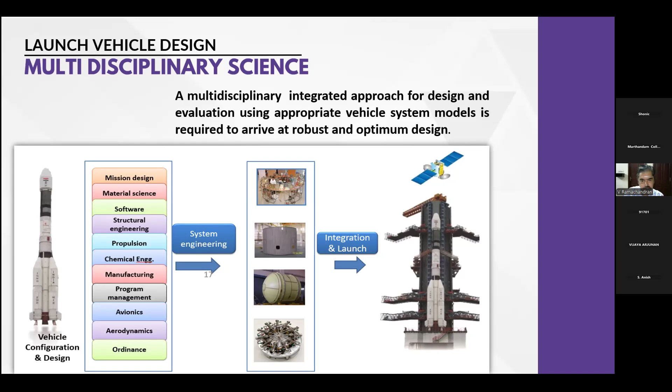So when you come to mechanical systems, it is not one system. It is having structures, mechanisms, control, actuation, systems like propulsion, assembly, and integration. All this comprises of very closely toleranced hardware.

And not only that, these structures are very optimally designed. If you ask what is the difference between an aerospace structure and a civil structure like a bridge, the bridge will have a lot of margin. It need not fly and it need not put an object in orbit. So the mass ratio plays a very crucial role in every system going into the launch vehicle.

So it is very carefully, optimally designed structures. The margins will be much less than 1.25, whereas civil margins will cross 10. The margin factor will be more than 10 in case of civil structures. In our structures, it will be 1.25.

That is the comparison. So it involves cleanliness control, like control and propulsion systems have to be assembled in a very controlled, contamination-free environment. So all such systems are very elaborate systems and facilities. It cannot be just started like that. It requires very expensive build-up of infrastructure.

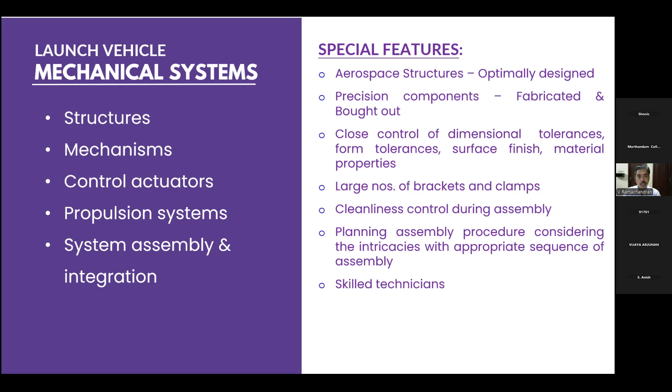So this is indirectly what I told about structures which are very optimally designed. Not only that, it has to work in various environments. Some are in vacuum, some are in high thermo-vacuum, some are in high dynamic environments like vibration and shock. So all such things are also very specific to our space system.

If you see an automotive vehicle, that environment is reasonably understandable. Maybe road conditions may be bad, and to some extent road shocks will be there, so shock absorber design may be challenging to that extent. But here, aerodynamic ascent itself poses all kinds of criticalities for all the elements.

So that is one unique aspect - no repair chances. I have put limited repair only in case of the space station, where the next set of crew can go and repair if they find some problems. But in our launch vehicle, there is no chance of repair.

And I already told that the weight should be very carefully estimated. The project gives a budget estimate of mass for every component and system. It should not be exceeded. Otherwise, the payload capability will come down.

So it is very carefully designed, but we employ very high strength materials to take care of this. With a minimum weight, we can even go for maximum performance. As I told, very high cost facilities - dynamic testing like vibration tests, thermo vacuum chambers - all these are very hugely expensive, along with static test facilities which are all required to be built to test and evaluate our systems.

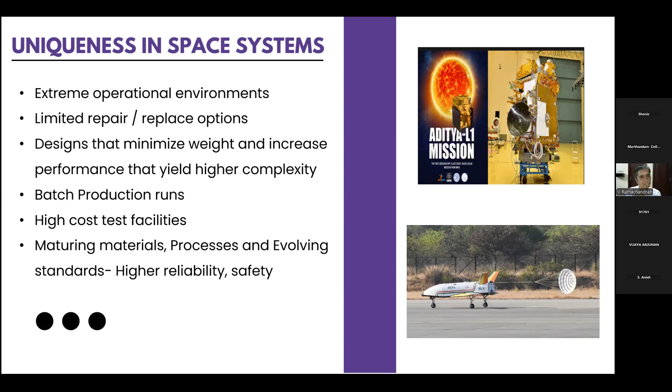Oh, this is a uniqueness. You might have seen the Chandrayaan launch, which got global welcome and appreciation for entire ISRO and the country. So the heart pounding moment is this: when you sit on the vehicle at the launch pad during the launch, the last 10 minutes is on an automated launch sequence. Nobody can do anything - it monitors all the parameters. It gives a lift-off signal. The vehicle is lifted off.

Another 18 minutes of the launch vehicle journey is also very exciting. Every system has to perform. You might have seen the nominal trajectory and the ongoing trajectory of the vehicle - you can see it almost overlaps. So that way, it is really heart pounding.

It is when the vehicle has put the satellite in orbit and the mission launch range director says the mission is completed successfully, and the mission director also confirms that it is put in the intended orbit, that it gives us some sort of satisfaction - like winning the World Cup, nothing less than that.

Everybody, if you go into the launch pad area after the launch, the people will be bubbling with energy and jubilation. Everywhere you find happy faces. This is a thing which you will not get in any other industry. This industry gives the challenge, but once the challenge is fulfilled, you get complete satisfaction and real jubilation.

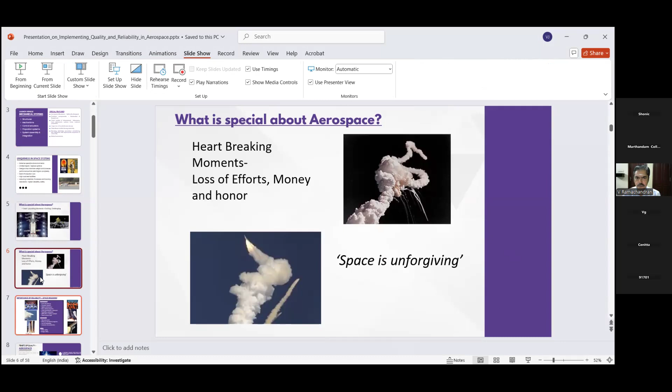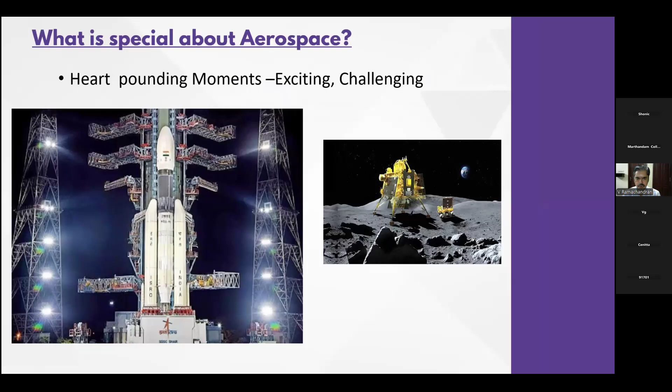Next. Yeah, this is whatever I told, the excitement and jubilation of a successful launch. Exactly the opposite is true if the launch vehicle fails at the launch. It breaks all our moods, and there is a reservation on the future of that particular project.

It halts the whole progress of the project for at least six months to one year. Anyway, loss of efforts, money, and honor, all this will bring the mood of the people down. Bringing it back again to normalcy takes time. So that is one risk.

If it is failing, it will break your heart, it will halt your progress. You have to redesign some elements, then it will go back to some level of progress, whatever already made, then you have to come back. Anyway, ISRO is capable of coming back, so that is not a big problem.

But temporarily, everyone will be down. What went wrong? They will be curious. There will be a nationwide committee which will address all these mishaps and give suitable remedial measures. We will come back, but this will halt the particular project for some time.

And sometimes, if the common modules are there in any other launches, the other launch vehicle will also suffer some progress halted for some time. After verification only, it will be allowed to go ahead. So in that sense, it is highly risky. Space will not forgive any mistakes, so that has to be kept in mind every time we do a space system realization.

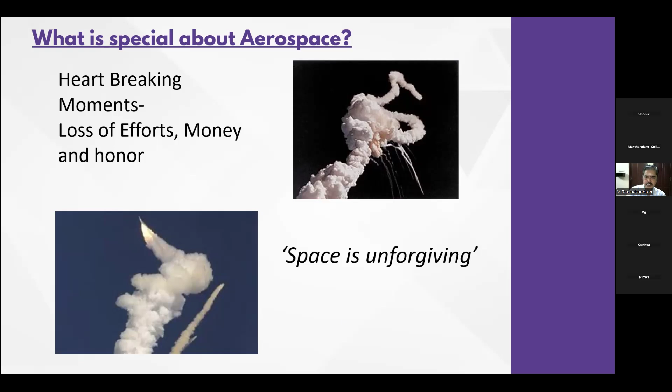This aspect of space being unforgiving means the problem, whatever escaped our screening, will show up in flight, and definitely we have to pay the price. Next slide, please.

So this is another mishap, the Challenger shuttle and Columbia. This is very famous, we lost a manned mission, which is the ultimate failure. We lost all the crew. When we go for a manned mission, all these lessons are addressed.

So how to have health monitoring of the vehicle, and how to detect that any problems are not there in the ongoing vehicle. Before return, we have to verify the health of the launch vehicle which is carrying the crew module. Subsequently, during orbiting, we have to constantly monitor the crew module.

If there is a problem during the launch vehicle ascent itself, we should bring back the crew at any cost. Even if we are not able to fulfill the mission, we have to bring back the crew. That is the crew safety aspect.

The range safety aspects are there in every launch vehicle, that is, if the vehicle is deviating from its intended path and crossing a safety corridor. Then the range operation director, who normally, if you watch a live program, he only says the first stage performance normal, second stage performance, he is the person authorized to monitor this.

And finally, he will see if it is deviating beyond a safety point and the vehicle can pose a threat to your local landmass, then he will take the call, after consulting management, to destroy the vehicle in air. So range safety aspects are there. Every stage has a destruct system mounted, and the command is given based on the requirements.

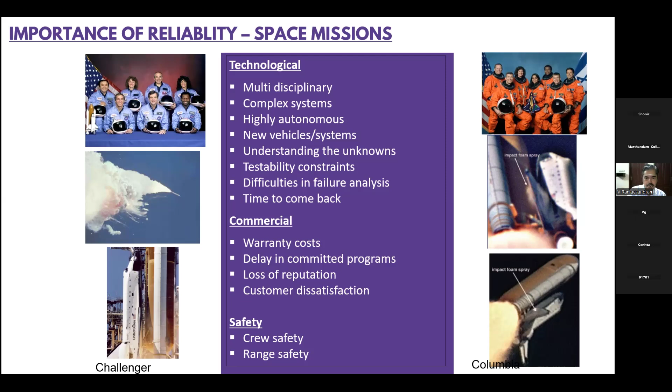So far, we haven't had to do that. Either the failed rockets were also falling in the sea, not posing a threat to the landmass, which is a blessing. Next slide, please.

Similarly, all our modular concepts are there. They have to realize and deliver on time. Between the teams, we have to communicate. There is automation in QC. Right from the work center, they can communicate with people. If there is some doubt, they can always check which way to progress. And if there are corrective actions to be done, these communication systems are there.

Even every deviation, however small, has to be analyzed and traced back. If possible, it has to be sidelined. Otherwise, it has to be decided based on facts and tests. That is what I have put. In some other slide I will indicate what the non-conformance protocols are.

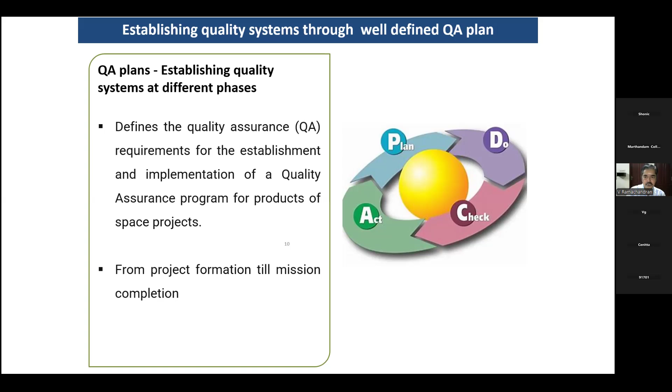Who will do the quality control function? Who will do the process control function? They define this through a document called the QA plan. This is done in a planned and systematic manner to ensure that the company's quality objectives are met at every stage of realization. So the QA people or management representatives give confidence to management that the company quality policy is adhered to at every stage of realization. At the same time, to the project, who is the customer, they confirm that the product delivered meets the quality objectives. So this is the definition of quality assurance, and this is how it is done, through QA.

So this is what I have already told. This insists on documented procedures, and all the requirements should be put for every phase, right from the development phase to the qualification phase, acceptance phase, and finally the flight delivery phase. Everywhere these documents and procedures are in place, and every quality assurance agency involved at every stage gives a paper confirming compliance, and they will give a compliance certificate. This is what is monitored by the overall QA system people.

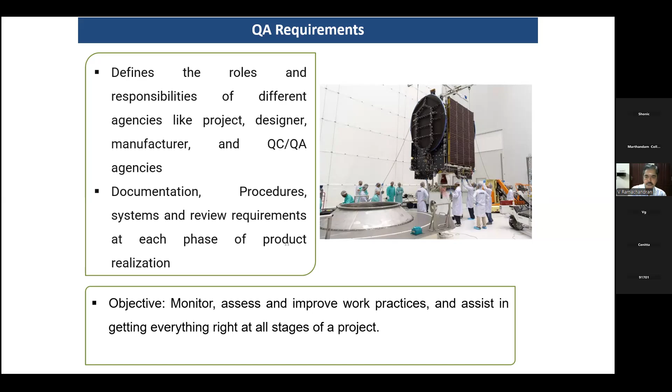This gives the overall plan, right from concept review to the flight realization phase. Here I will try to say two aspects: one is qualification testing, and later testing and acceptance. The qualification testing will bring out the margins in the system. It is done to evaluate the design margins, like the factor of safety of 1.25 put in a typical structure. So these structures or prototypes at realization will go through the required load cases and ensure that the qualification testing proves the factor of 1.25 is really there in the design, through the model tested. This is the aspect of qualification testing. Some other aspects of qualification I will cover later.

The flight system acceptance is slightly different. This is done to assure the flight hardware against random defects such as workmanship or raw material issues. These defects cannot be captured in a regular screening process; in spite of the screening, they may escape. So the idea is that it should pass successfully in flight. These factors are slightly lower: the factor of safety for qualification, which I said was 1.25, will sometimes be 1.1 for certain high caliber pressure vessels, and can be as high as 1.5, where the margins will be much higher than 2. So acceptance test is done at a level just above the flight levels, so that once it passes, it gives confidence it will successfully pass through the flight regime. That is the idea of acceptance test. We can go to the next slide.

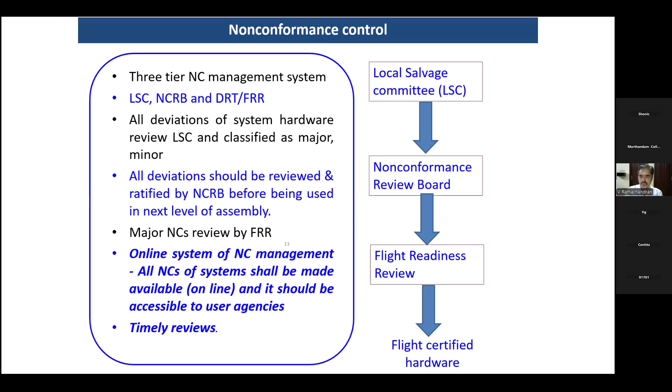So this will come back later into the production line, or it can be sidelined if they feel it is corrosion and cannot be accepted. The local salvage committee's decisions also go through a ratification process by NCRB before going to the flight readiness part. So before submitting to flight readiness, after processing, this will get both LSC clearance and NCRB ratification. In the flight readiness review, they check whether all the non-conformances have been reviewed by LSC as well as NCRB—that is what they verify. All this data will be given by the quality control and quality assurance agencies. Finally, it will be certified hardware for flight. We can go ahead, next slide.

Now we will come to the reliability part. Quality assurance is very clear—systematic operations, documented procedures, a set of people who take care of every stage of realization. They give a final paper on product and process compliance. And if there are non-conformances, there are specific processes everyone has to adhere to. Once that is over, the QC confirms in FRR that all these things have happened. So finally, quality assurance concurs, based on which FRR certifies the product for quality. This is the route for quality assurance.

When it comes to reliability, the first part is very clear. If you ask anybody what is meant by reliability, it is to perform over time. Last year I purchased a mobile, and still now it is okay—it works well, no hang, no green line, so everything is fine like that. You feel this particular model by this particular company is reliable, we say. Quality is adherence to specification, but over time, if it is maintained, then it is reliable. It can also be viewed as failure mode avoidance—if it has no failure mode left, and has enough success paths so no end functioning is affected, then it can be considered a reliable product.

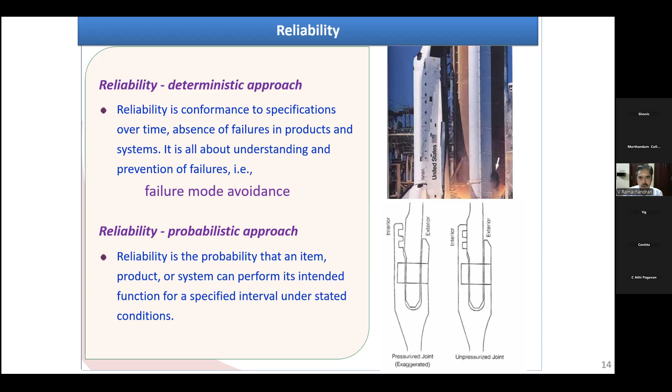This is put in some other fashion, same. The failure time to failure should be beyond the specified intended period of time. So it should meet the designated period of time of functioning under stated conditions. That's what the first para says.

There are certain prediction methods available for electronic parts. MIL handbooks give the failure rate. Similarly, for certain machine elements also, failure rates and reliability input data is available. But this is all okay for part selection, but it gets into a system through a process. So that process related, how it interacts with the subsequent during the process, it does not come in the prediction. So you can use it for selection of high reliability parts, but that will not give the end reliability of a system through prediction - it is difficult, it has got a drawback.

So normally in avionics we have the preferred part list, which will be taken care of by this MIL handbooks and things like that. If we have our own established parts, that also will be used.

When you come to demonstration, reliability also can be demonstrated through test. It is slightly fishy how you can get a reliability by testing - that is a question I will explain later. But first is a success rate. You might have seen 0.99, launch shuttle is 0.999. That is 1 in 1,000 like that. It is nothing but number of successful tries over the total number of tries. That is what meant by success rate.

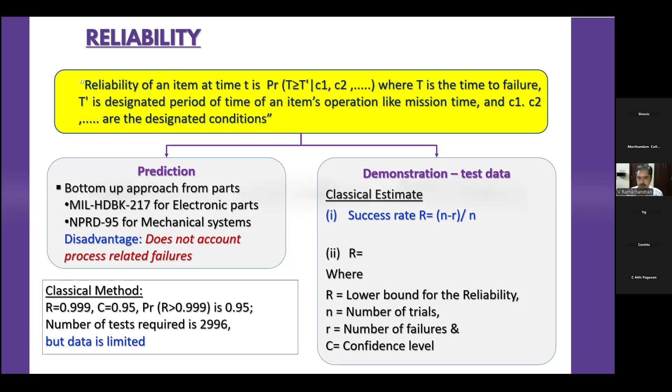So now I will introduce one particular area where this demonstration, reliability demonstration is happening. These are all called one-shot devices. This one-shot means it can be operated only once. These are all used for some mission critical function like stage separation, stage ignition, or even the liquid propulsion system allowing the fuel and oxidizer into the chamber.

So these are all very important functions for successful functioning of a launch vehicle. Bolt cutter cuts a bolt, thereby affecting a separation. Pyro thruster affects a ball lock system, which keeps the stages in locked condition. Upon command, this pyrothruster gives a definite stroke to a ring which releases the ball, thereby affecting a separation. Similarly, a pin pusher also affects a ball lock system which is released - the ball is released by activation of this pin pusher. These two are different valves - one is used in liquid engine, one is used in space liquid apogee motors. Go ahead, next slide.

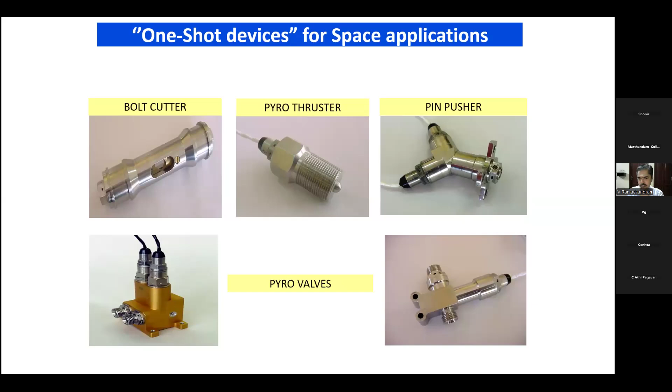So these are all single shot as I told. So these are all the functions as I explained. The first is the broad functioning of these devices, where it is used, which I explained. The second is the unique characteristics - it cannot be checked prior to flight because of single shot in nature. The item which is going to flight assembly cannot be tested, which is a huge drawback, but it is employed in a very crucial function. So you can note this.

So definitely something we have to do on this to provide confidence. In spite of that, why we are using it is because it delivers very high energy per unit weight - all are very miniature systems, as you might have seen in the photo itself. If you want a mechanical testable system for similar functions, it will become very huge, and definitely it will eat up the payload effectiveness of a launch vehicle. That is why, in spite of such drawbacks, it is still used.

And another drawback is it will deliver the high energy in a very short duration, so high impulsive load and shock loads will be there in adjacent systems. When in vehicle engineering, this has to be kept in mind - no sensitive packages or items should be kept very near to these actuation systems. That has to be done.

And some of these things are now overcome. Engineering approaches are available of late, but originally it was all made based mostly on thumb rule and experimentation, trial and error type of systems only available. So they decide on some charge quantity to make it work by trial and error - this was what was followed. Now, dynamic event modeling of these devices is available. They can precisely predict how much quantity of charge is required to perform this function with these intended margins. Go ahead with the next slide.

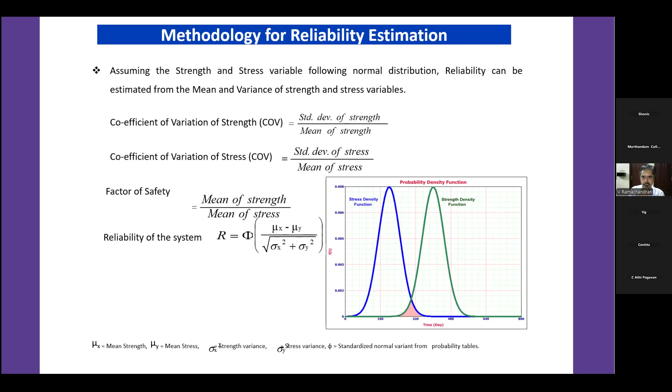Go to the next slide. So these two, binomial distribution and normal distribution, are used for reliability estimation. Now we will come to some aspects of reliability in design.

Reliability definitely cannot be tested out or inspected out, so it has to be built in through design. As we told, parts should be of high reliability, materials should be of superior quality, and process should be controlled, and certain aspects like critical thickness and critical dimensions are to be verified for every part to ensure there are no anomalies. So right from the concept stage, reliability has to be kept in picture.

It should be verified at every stage. Sometimes the design will go through an iteration, but still there should not be new failure modes and new causes of worry. So at every stage, reliability has to be kept in mind. Robust design is about how to control these errors, how to make the system capable of accommodating certain noise factors - that is about robust design.

How to use it? So we will test it to extend this. The 3-year life itself is given based on some 4.5 years of successful testing, so that 4.5 years of data is derated to 3 years and applied. That way only, shelf life also is specified. So this order of derating is there, and for further extension also similar procedures are applied.

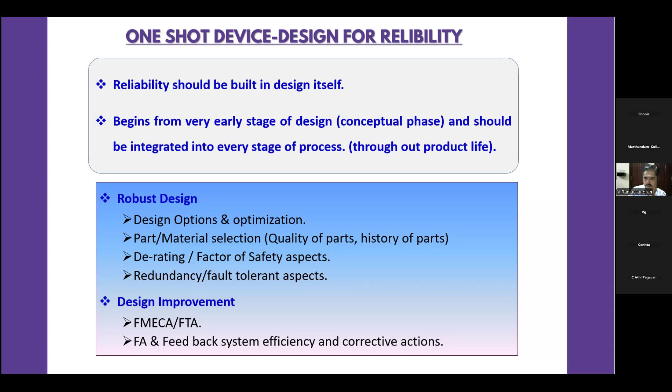This is indirectly putting the same - the roles of QA tools employed in various phases of the product life cycle. Design phase I have already told. Qualification phase I have told something on qualification margins. Here I have applied this to single shot devices, where the qualification test plan aims to demonstrate reliability.

So in addition to functional testing at ground, various environments these items will be subjected to - and for every environment, certain elements will be taken out and tested to find the influence. Suppose thermal soak is the first environment, certain elements will be tested. If it passes, next environment like thermo vacuum will be introduced. After that also some elements will be removed and tested - sequential subjection and pull-out to assess.

Dynamic environments also will be done. Finally all systems will be tested - whatever remains goes through the entire series of environments and whether it has passed or not will be verified.

This qualification test plan and its sequence is made by QA. In this case QA only defines the number of elements to be subjected, whether it should be tested in a single initiation scheme or a dual redundant scheme during testing - all these things.

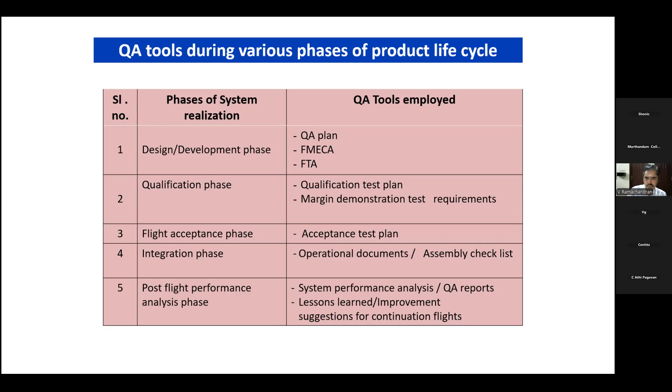So this is putting in some other fashion how to improve reliability: reduce complexity, prove systems, reduce the number of active elements in a given chain. Because the reliability in a series chain, if n elements are there, it becomes a product of all these elements. Naturally all are less than one, so the product becomes lesser. One element's reliability, if two are in series, will be lower than one element's reliability. So definitely you have to reduce the number of active elements in a chain, use high reliability, go toward design margins, redundancy. These are all salient aspects of improving reliability in design.

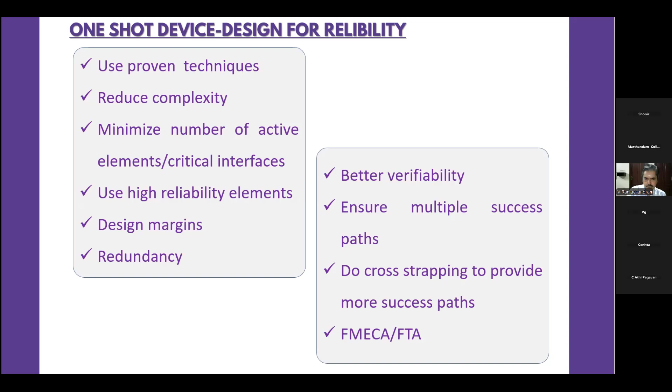Similarly in FMECA, we will see what are the weak links in a design, what are the single point failure modes which have to be addressed. Either it will be tested out, or if possible, redundancy and success paths have to be generated.

And certain things like critical assembly, there are certain hold down bolts, some restraint elements in a system to enable ease of assembly and safety of people. These elements prevent a system from releasing or jettisoning. So such hold down bolts or safety pins have to be removed, otherwise the system, in spite of functioning, will not separate. So such an important checklist has to be verified, whether it is incorporated there.

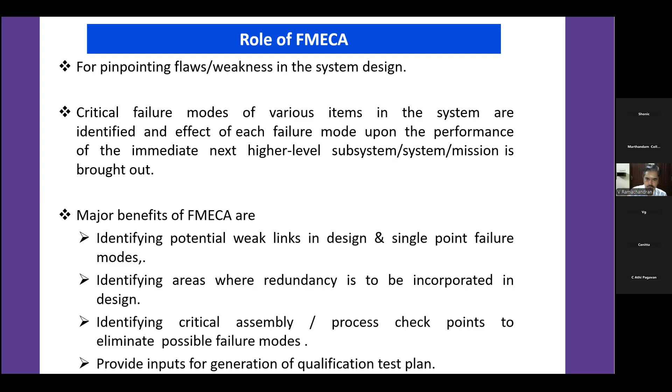And it is implemented during the launch campaign. So as I told, it will give good insight into qualification, whether to do it in single chain mode or dual chain mode, like that.

So here's one example. What I'm saying is it's a heat shield separation system. It is having both vertical separation and horizontal separation.

The heat shield has to be jettisoned, meaning imparting a sufficient velocity, something like 6 meters per second. The system has to deliver this to the fairings so that it clears the vehicle. The vehicle is in ascent mode, and the payload fairing is separated while the vehicle is in acceleration mode. So it has to clear the vehicle as quickly as possible so that it will not collide with the ongoing vehicle. That 6 meters per second is the specification for vertical separation.

Horizontal separation uses a bolt cutter and a clamp band rod as I explained. The command is received by the autonomous safe-on device, subsequently taken to the respective initiation point of the system through transfer lines, through a manifold, and these are all explosive units. If you don't give additional length for the vertical system in comparison to the horizontal system, both sometimes happen simultaneously, or sometimes the vertical system may slightly precede the horizontal separation. In that case, even though energy is delivered, it still will not go out of the vehicle.

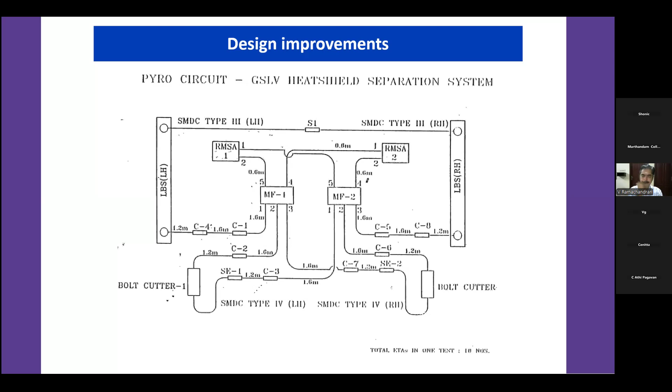Similarly, in some areas we use quadruple redundancy instead of dual redundancy. Some hold and release systems are there, which is a hydraulic system; there also we have gone for quadruple redundancy. This launch hold and release system is used in GSLV to prevent the vehicle from lifting off when the L40s are firing. So it is verified for proper functioning of these four liquid stages. Once it is meeting the requirement, then the LHRS is released.

The release function also should be verified by the ALS, automated launch sequence computer. So that release command is verified, then only it authorizes the solid motor ignition, thereby enabling the liftoff. So that confirmation of the release function should not be through some spurious chattering of release function detectors like connectors. So there, the triple modular redundant logic requires 2 out of 3 to confirm that release has happened. That is also what we have incorporated. These are all part of the FMECA which has improved the overall reliability of the system.

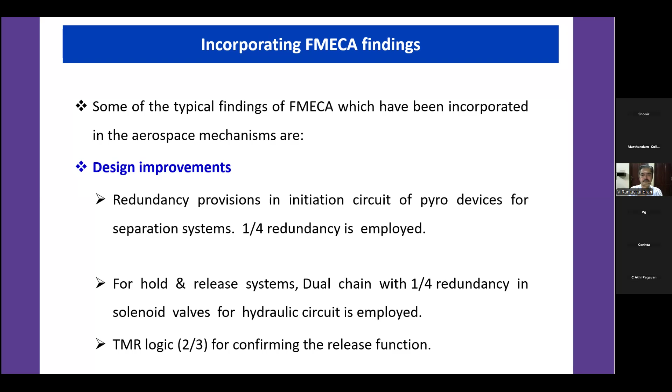That is because initially I explained we should have 120% of charge demonstrated as part of margin demonstration. So if you have a dual cartridge, 240% of the charge has to function without any disintegrity of housing in the mechanism. Designers expressed concern that it will become very huge and complicate the design. So we heard this, and even though reliability wanted it this way, we finally compromised to some extent.

We found the major reliable redundancy is required where electrical energy in the squib is converted to chemical energy. The chemical energy is further amplified through the main charge, affecting function. So between squib and main charge there are no new failure modes. With electrical energy conversion we can have an electrical failure or a squib failure due to its own charge-related failure. There, quadruple redundancy is required. Within the main charge, there are no new failure modes. We agreed for this - that system only is flying in GSLV Mark 3.

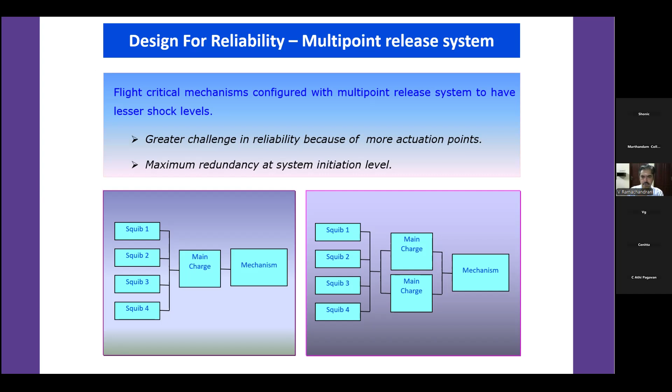This is another way - you can see the solid motors are ignited, the special purpose motors. Two motors are adjacently located, so you have a safe arm device through the explosive transfer, it initiates an initiator called TBI. Left side is very elegant - you see less complexity involving fewer active components.

Right side is in line with the single motor, which the main motors of large vehicles have got this circuit only. But when you incorporate more motors like this, it becomes so much complex. It has to be housed in an intrastage where some 4 motors are there, so it will become heavily crowded with a lot of explosive circuits running inside a cramped subassembly. So here we found, even though the option gives a marginal improvement, we agreed for the first configuration, which is only flying in Mark 3 vehicles.

So this is also a way to reduce complexity - maybe a small compromise in reliability, but worth doing. It avoids another component, number of explosive lines are reduced, that indirectly improves reliability. So this is another approach. Go ahead, next slide.

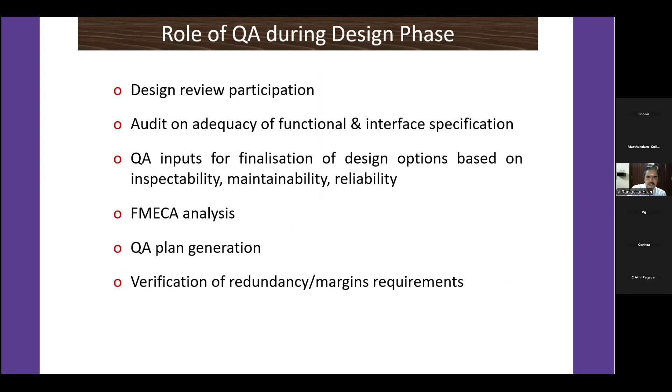Similarly, the output of FMECA, we generate a qualification plan. One thing is most of this FMECA will lead to some insight into where these items are getting assembled. Once the pyro systems or explosive systems function, it can affect the pyro shock, where the adjacent systems are located, whether it is away or needs to stay away. So there is a requirement of pyro shock test of the sub-assembly.

So at integrated level, we do system functional testing. All these adjacent modules as in flight are assembled and their functioning is verified after subjecting them to this shock survivability test. These types of inputs are taken from FMECA and used for deriving qualification or acceptance testing.

So sometimes debris is also generated. I mentioned bolt cutting - the bolt should not fly away, so it should be contained. So whether such systems like shrouds or some capture features are incorporated to prevent any flying debris, all such verification will be done in overall system configurations.

It may not be a part of that particular system - it will be part of the sub-assembly. At that time we will verify based on the FMECA findings. Can you go to next slide, please?

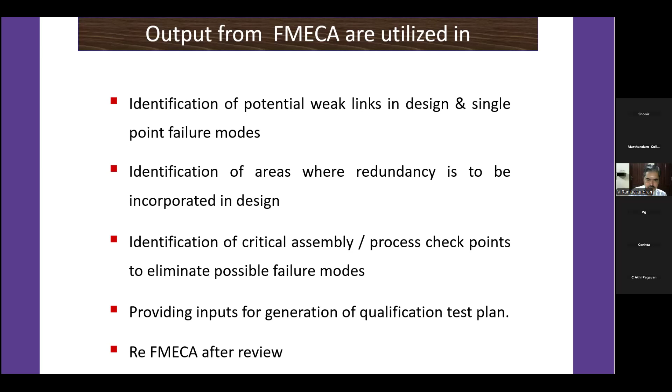This development test is what I told you earlier, as distinct from qualification. Development is definitely a part of the design and development teams - freedom is there, they will have a drawing, and they are also free to evaluate their system limits. They may go slightly beyond the margins also to see its limits. Sometimes it can be done at a subscale level first and full scale level later. All these freedoms are there.

Sometimes the cold soak environment will be more appropriate to test the effectiveness and confidence, so sometimes they may be subject to environmental test. For example, cryo stage, a lot of pyros are there. It has to be tested at liquid hydrogen temperature, like 20 K. At 20 K, the item has to function, it is a chemical, so whether it will function or not has to be verified.

All such verification will be done as part of development first. Once they have minimal confidence, they will offer for qualification phase where quality people can be observers just to see what is happening, what is the limit, and it will improve their database, but they need not interfere with their freedom.

In qualification phase, it will be based on an approved plan. It will have all the documents. Every test scheme will be reviewed by committee. Every article going will be certified. Process compliance is ensured for these articles.

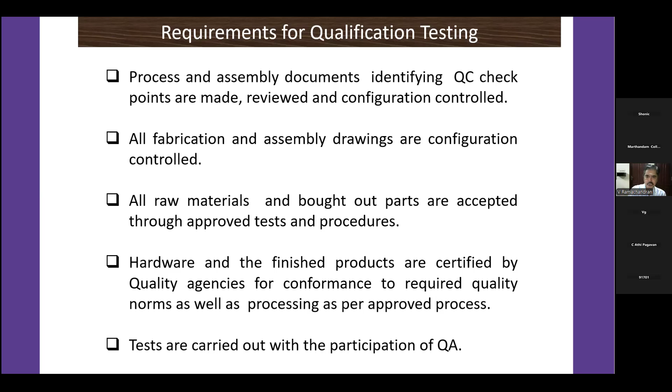This is a process document, whatever I told about configuration control - this is also a process. Here also, if it is a pyro area, all the peers in the area are members of a process review committee. The developing agency will present the way they want to process the particular item, and it will bring out all the raw materials required, other items.

There are some O-rings, some sealants, thread sealants, Teflon tapes and chemicals used in processing. All such items - what is the make, what is its precedence, where they have been used - all this will be discussed. The peers also will contribute, suggesting 'go for this supplier rather than this supplier' - all such inputs you will get in the review.

Finally, this process document also will be a controlled document, reviewed and released. And this document also contains the acceptance plan for each system. It gives an assembly and checklist. The QC checklist is also part of the document, where observed values will be presented and the compliance certificate will be presented later to flight readiness and review committees by QC.

There is an NDT committee which also reviews the NDT outcomes with its own acceptance criteria. So NDT is also very much important in all this - certain orientation of particular hardware. There are certain conical boosters, it should be in a specific orientation. If it is put the other way, major and minor diameter wrongly oriented, it can lead to functional problems, so very important deductions have to be made there.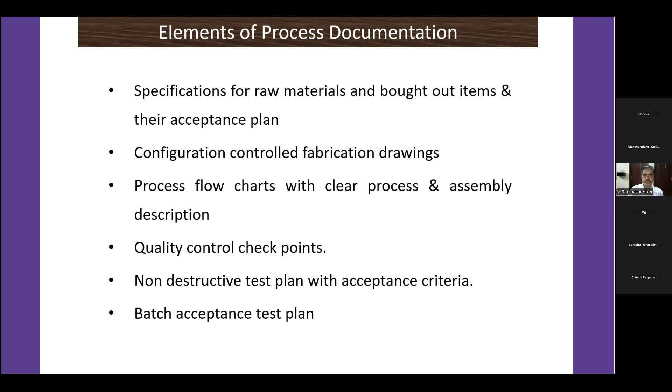In acceptance testing, it is more or less similar - whatever I told in qualification is applicable. Finally, they will give a certification of the product which will be presented in flight readiness.

Here I will come to what I skipped earlier: how to arrive at the reliability value for a pyro device. You can note down four factors: criticality, state of the art, verifiability, and complexity. These are all given certain numbers based on experts and the reliability engineer.

I will show in the next slide how it is implemented. For a very critical item, the criticality factor will be 3; if it is minor, 1, so it will be between 1 and 3. State of the art also - if it is a proven design adopted as-is, it is 1. If it is slightly modified, it is 2. If it is altogether a new design, then it is 3.

Similarly, certain aspects can be verified. If it is totally not testable, 1. If it is totally testable, like a hydraulic launcher hold release system, it can be done. If it is something in between, partly tested and partly not tested, based on judgment we can arrive at any number between 1 and 10.

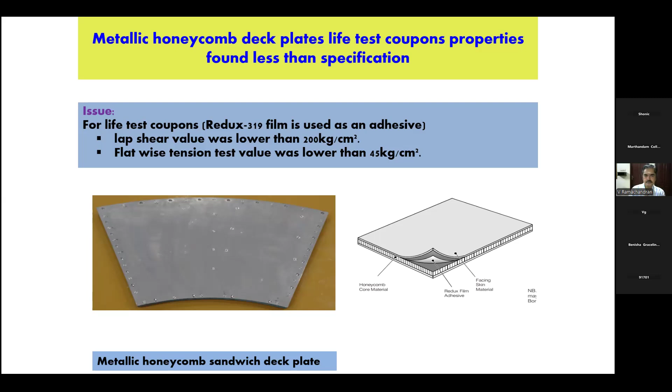These deck plates were in demand at that time, nearing launch. Some 2-3 L decks had to be assembled and had to meet the vibration test goal, putting all the packages on the interstage. At that time the life test coupon showed a very low value. Life test means it will be tested in our center - some initial tests are done by the work center, the values were okay, decks were supplied. The life test coupon which came along with the deck showed this inadequacy.

We found that surface preparation was not good. Just to give an idea, it should have a crisscross pattern etched into the surface to aid adhesive bonding. That was not evidenced in the coupons, so we found this preparation had led to the very low value.

But a question remained whether the deck was acceptable - the coupons were bad, not acceptable, but what to do with the deck? So we found a deck which was realized during the same period using the same adhesive batch, same oven conditions. We extracted coupons from that deck and found those deck plate capabilities were okay. Then we cleared the decks which were supposed to be supplied after this test.

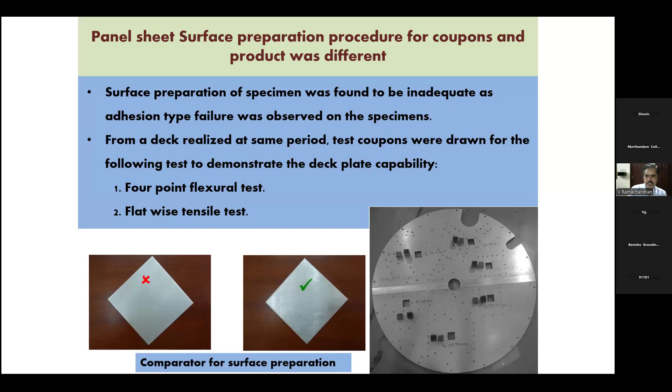Go to the next slide. Anyway, it is not a good idea - it gives some element of uncertainty. How well this sample deck would have represented the actual deck is a question which is valid.

So later we found - we were insisting this earlier also - these coupons are not a real representative of the deck. So the deck itself should have an extra area to extract a coupon right from the deck after completion of all the processes. So later all the drawings were amended, extra area is provided on the deck to extract a coupon after successful processing. If those deck coupons are okay, then only those decks will be supplied to us.

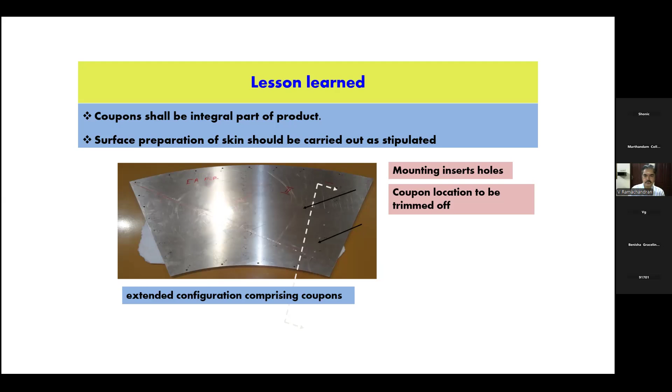So this is implemented, it looks now very elementary - it should have been done right from the start. All these lessons are like that - you find finally this should have been done in the first place. Why did you go through a sample and get into a problem? Natural question. Next slide, please.

This is another case. What I have not told is that the first stage separation is by an explosive cord, which cuts the stage - a 7 mm thick interstage is cut by an explosive cut to affect the separation. You can just see a 7 mm thick forged ring is cut by an explosive cut, so that is the capability of the explosive cut. How that explosive cut is accepted - it's a 4.4 meter long processed cut, so it should meet some charge density conditions, which will be checked at the ends, and some sample cords are tested. Every end of the cords also goes through a test called the flat plate test.

Only I am showing this. To our surprise, in one of the batch testing, we found every cord will go through a 20% higher thickness margin test. As I already told, we will not take chances. So 7mm thick means an 8.4mm thick plate has to be cut from the same flight batch of cords, then only those cords will be sent for flight integration. That test failed in one of the tests earlier.

But it is a flying cord with so much heritage. We were wondering how it passed as a successful nominal test but failed in a margin test. When we looked at it, we found that the plate which is extracted for a flat plate test was oriented against the FLSC, across the grain flow of the plate.

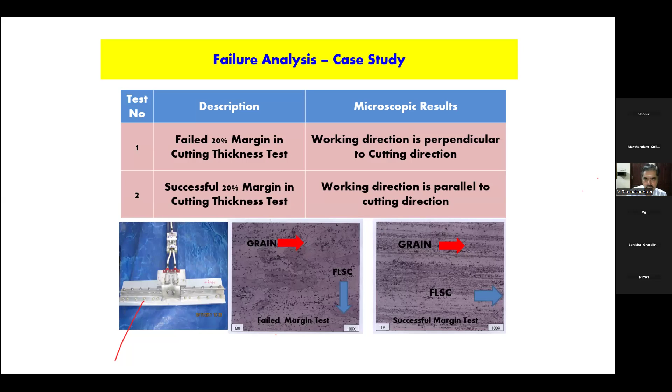This is something which happened at random. All the time they were following this correctly, they never cut across, but that particular time they cut and it failed. So it has given some more insight into tightening the test article clearance. Good, next slide.

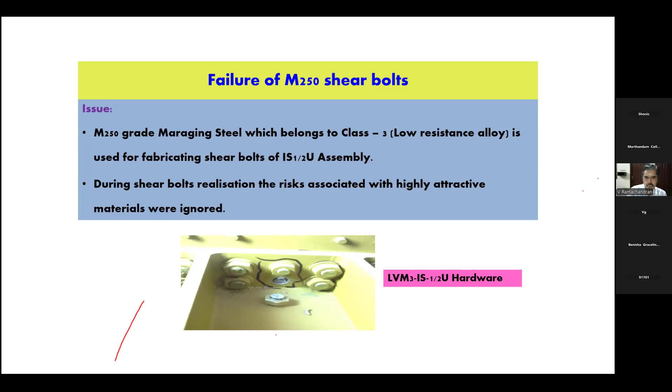Okay, this is a shear bolt made of maraging steel which has failed. We can go to next slide. I will slightly rush up because we are nearing 7:20.

This is caused by a condition called stress corrosion cracking. Three conditions are required: the material should be susceptible to SCC, it should be closer to a corrosive environment, and there should be a pre-stress in the element. So all three are applicable here.

We are in either Trivandrum or Sriharikota, it's a coastal environment, so corrosive environment applies, and maraging steel is highly prone to it. People tend to use maraging steel only because of its attraction of strength, but it is wrong to put it in a bolt like this because bolts are normally subjected to a preload, which causes the third element - pre-stress.

With all three conditions present, this will not fail instantly - over time it will come out. That is the risk in SCC. As installed, everything will appear fine, but without any further load, even when stored, it will fail. That is what happened here also.

The stage is kept on a bay. Suddenly, somebody found it has failed on board. So later, corrective actions - next slide.

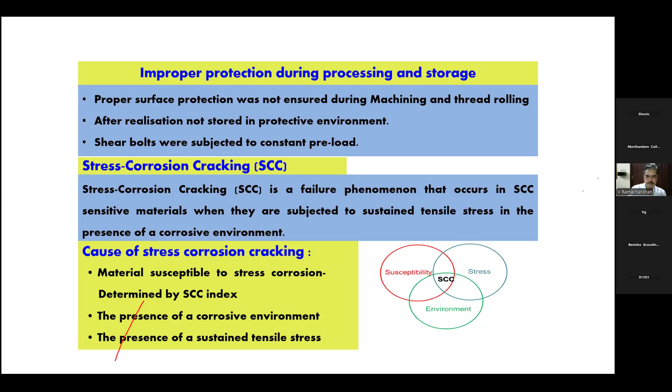We have gone for a safer material, something very close to that. We should have some protective coating if possible to prevent the corrosion getting into this. And residual stress in some cases can be minimized by heat treatment, but it's always better to go for safer material.

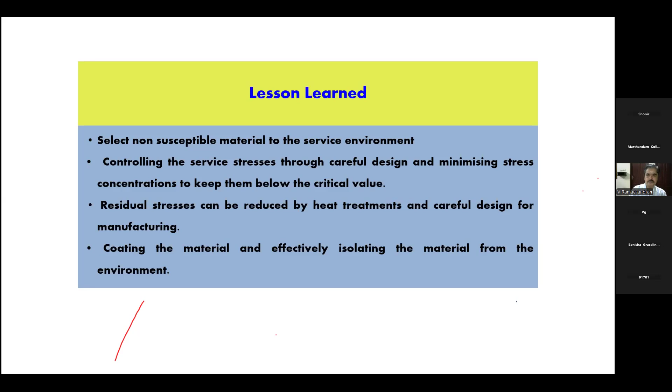Something similar - a Jo-bolt is nothing but an equivalent of a rivet, but it can take care of both the tensile stress as well as the shear stress. A rivet can handle only the shear loads, but here it can take both shear loads as well as tensile load. That is the attraction of Jo-bolts.

Some Jo-bolts, just like rivets, will not rotate. But when submitted for our PSLV integration, we found certain bolts had rotated, meaning they were loose. So that is an issue. We can go to next slide.

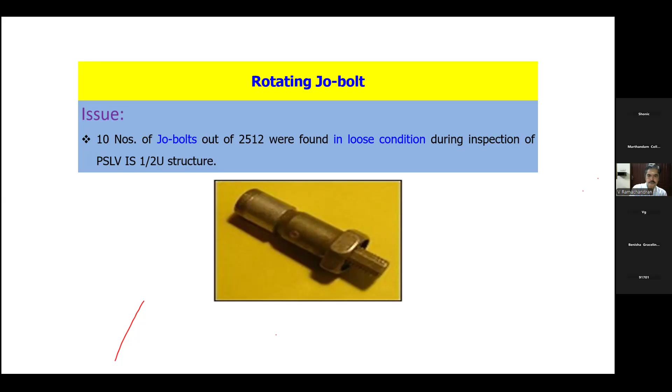These Jo-bolts are a proprietary item, supplied as a procured item. They give the kind of tools and installation procedures - what the break-off length is, what the hole size is, what length is to be used - all are specified. Next slide.

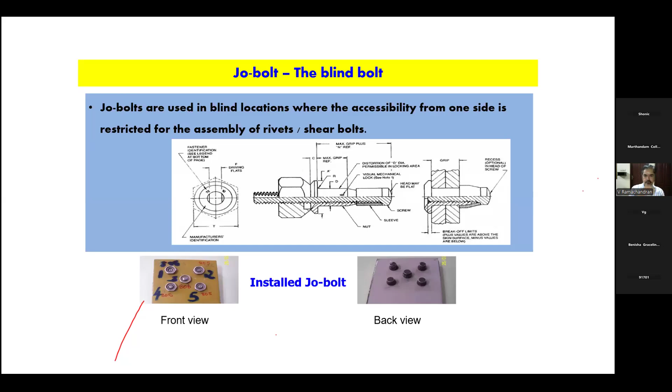So it is a good idea to first adhere to the supplier's procedures. Second, verification you have to do only at the end, not after immediate installation. That is the lesson I have put. You can go to the next.

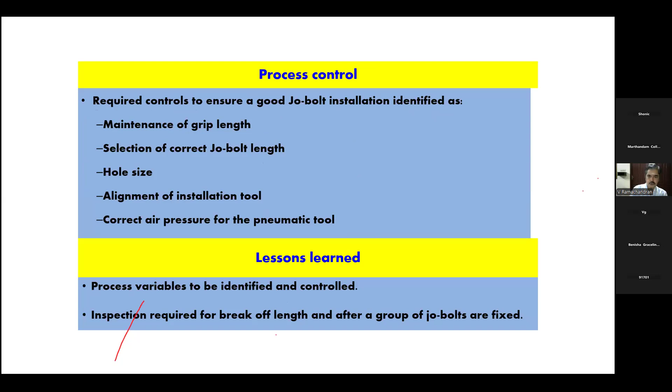Similarly, there are two conditions of aluminum alloy, one for skin, another for stiffener. This T4 and T6, somewhere at the work center we found it got interchanged, which is not good because one requires higher strength, so naturally we cannot use a lower strength material there. So we found how to verify that this has not happened. Anyway, we got to rework, but what happened to the suppliers earlier, which is waiting for future flights?

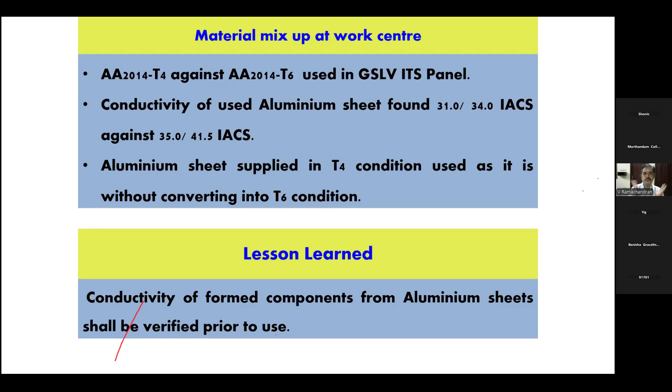So those things were verified for something called electrical conductivity. You can note this IACS is the international annealed copper standard. The conductivity of aluminum is compared against the conductivity of copper, that way it is defined, so there is a specification. It was found lower, so it is always possible to verify any finished order. These checks are done for ruling out such a mix-up, which is already cleared and accepted. It is a lesson we have found in this, so we introduced an additional check of conductivity measurement. Next slide.

Similarly, a height difference because of some improvement in jig height measurement of a core base shroud, which is the lowermost interstage supporting the solid motor, showed a 3 mm difference. This 3 mm difference is not acceptable considering its overall height of say 2.5 meters. 3 to 4 mm is that sensitive, because it involves certain interfaces which will be mounted external to this. We looked back, can you go to the next slide?

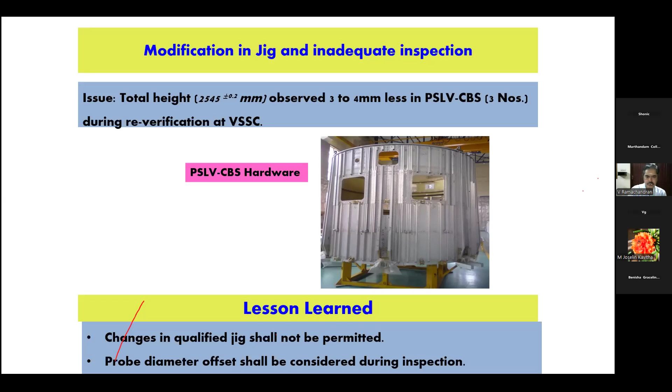So this jig change has caused this. To prevent certain shim usage, somebody incorporated the shim feature into the jig itself, but the assembly people using this jig customarily put the shim also. So there was already a built-in shim as well as an externally put shim, which caused this error. But it was not detected at the work center because the laser tracker inspection probe had a diameter equivalent to this difference of 3 mm, so the probe offset was not included in the measurement. It gave an expected value, so nobody suspected and cleared this.

When we measured at our Vikram Sarabhai Space Center, we detected this, due to which three major hardwares were sidelined, used for PSLV with core alone configuration, which doesn't require these interfaces. So very costly. Core alone missions were there, which came handy to use this. But this type of change is very, very critical. We cannot do any change in established procedures. Can you go to the next slide?

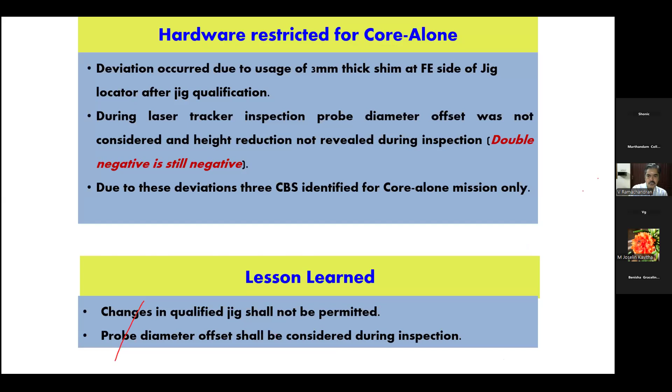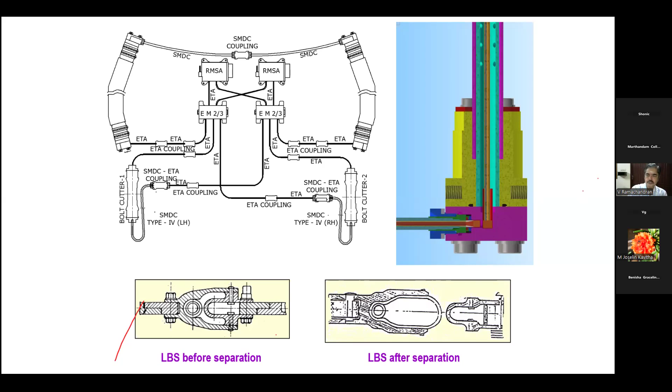So it failed. This is the radial initiation mode, which is not preferred in explosive train circuits. Radial initiation is the least preferred mode of initiation, but it was flying like this for so many years, so we never looked back on this. The C39 failure opened up this fallacy in the design, so we switched over to an axial initiation mode, which involved some modification in the systems. Finally, this axial mode, with the 5 mm, 4.5 mm expansion causing movement of the vertical system from the initiation point, can jump as high as 10 mm. As a margin demonstration, they even demonstrated 20 mm during the qualification, pre-qualification phase. It is very robust, so we should be able to withstand such a noise factor. There was a thermal environment which caused some expansion, but our system was very sensitive to that environment. So this noise factor, and there was lack of robustness in our system. Can you go to next?

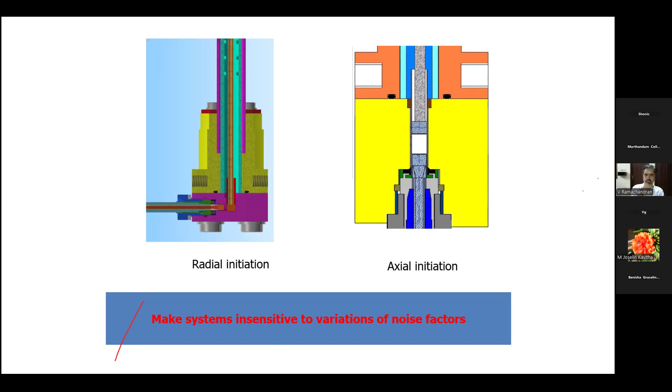So in such cases, when we come to system reliability, the organization should be very supportive and give a free hand. We felt this always, even after failure, no individuals are targeted. They give freedom. Even when individuals come out with certain anomalies detected, they will be welcome, and they see that corrective actions are incorporated, even though it causes certain difficulties of undo-redo type of tasks. They are appreciated. Sometimes openly the chairman has appreciated people for bringing up certain specific anomalies which were not detected. So such an open system and non-blaming culture is required.

So we should promote this in aerospace systems. Even in passenger flights and all, we should welcome such feedback. Viewers, even users, even passengers, can give some ideas to this. That is what prevails there. So we should be open-minded.

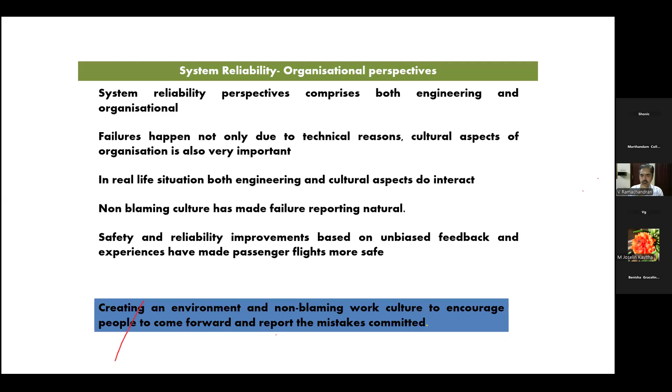Similarly, the working people should be aware when they do flight integration, they should concentrate fully on their job, doing it right the first time. I told you, every launch vehicle is new only for us. For reliability purposes, based on the number of successful flights, we give some number, but actual things are progressing as if it is new to us. Small errors can lead to very complex problems.

So a 4 mm error, just now in the previous slide I told you, it caused one mission which was very heartburning to all of us. But ISRO always comes back, bounces back, by properly addressing what is the limit of the system. Those decisions are made by concerned experts. No management thrusts their idea into this. The team who is capable of taking the best decision is only entrusted with taking such a decision.

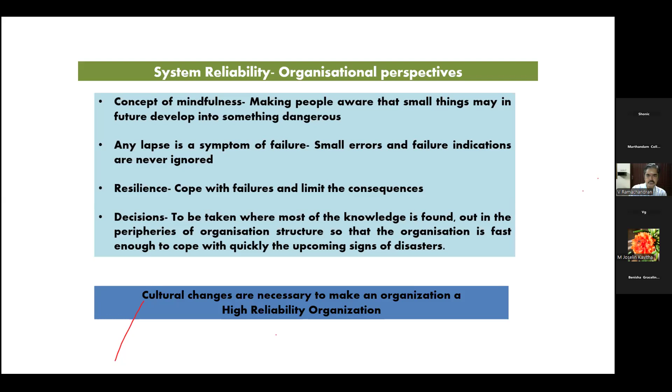That is also a good sign of an organization, a high reliability organization. These are all certain cultures we should follow. So this is my last slide. Thank you for your patient hearing. So the zero defect program also says that everything we do, we do with full concentration and do it right the first time, and every time. So this should be the motto, not only in aerospace, but whatever job, even an assignment, when we prepare.

I think some FMECA, FTA examples can be used in real life products. You can see user manuals of certain electronic devices. They give an attachment in the manual, a troubleshooting one. That is nothing but based on this FTA, they try to make the consumer itself capable of finding out what went wrong before embarking on the service centers. These are all something we can adopt from aerospace to even everyday life.

And we should concentrate and do our work. We should not lack concentration when we do our work. That is the motto of zero defect, which can be used in every industry. Thank you for your patient listening. Thanks to the organizers for giving this opportunity.

A few more acknowledgements I have to make. This presentation is made with the help of certain friends, Dr. Murugesan, who is retired from VSSC, Mohan Ananthanarayanan, who is a stalwart in the quality control area, he is also retired, and Sunoj and Maruti, who are still serving in the mechanical systems area, they have contributed to this. Maruti is a reliability expert. He is working on some new methodology of, with minimum data, how to arrive at reliability. He is working on this. All these people have helped in making this presentation.

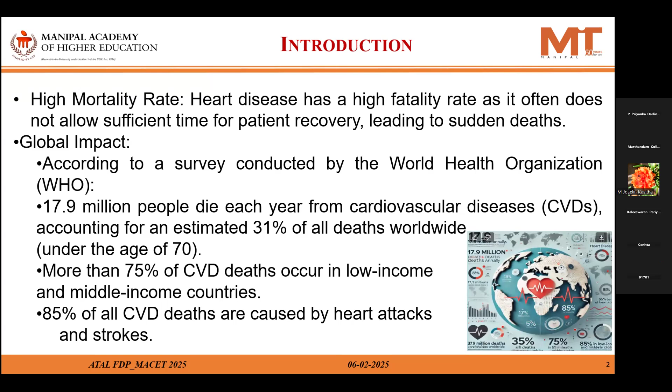So the need for this, why heart disease prediction is required. The first reason behind this is high mortality rate. Cardiovascular diseases are the leading cause of death globally. As I told, World Health Organization statistics show 17.9 million deaths occur annually due to cardiovascular disease, that is 31% of all deaths worldwide.

When we see the real world scenario, there is a 55-year-old man with no prior symptoms who suddenly suffers a fatal heart attack. So here the heart disease often remains undetected until it's too late. So it is very essential.

The second reason is early detection saves lives. Many heart diseases do not show early symptoms, so prediction enables preventive measures and timely treatment.

There is a real world scenario. When we take an example, a 42-year-old woman undergoes a routine checkup and is found to have high cholesterol. So there is a symptom. They can find this symptom immediately, so timely intervention helps her prevent a heart attack.

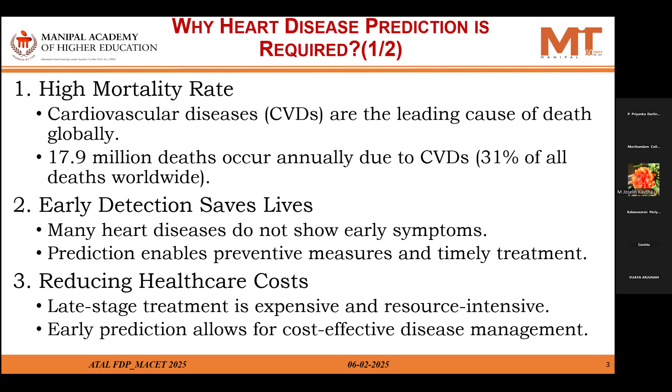The third reason is reducing healthcare cost. Late stage treatment, when the disease is at its last stage, is expensive and resource intensive. So early prediction allows for cost-effective disease management. When we take the real world scenario, a 60-year-old diabetic patient follows a preventive care plan after being flagged at risk for heart disease. This avoids costly surgeries like bypass operations.

The fourth reason is high risk population, like in developing countries like India. There, 75% of cardiovascular disease deaths occur in low and middle income countries like India. Early identification can help implement preventive healthcare strategies. In the real world scenario, in rural India, lack of healthcare access leads to late detection of heart disease, resulting in high mortality rates. Now we have AI-based remote screening which helps identify high-risk individuals.

The next need is advances in AI and machine learning. Now AI-driven predictive models improve risk assessment accuracy. It also helps doctors make informed decisions and personalized treatment plans. In real time, hospitals use AI-based models to analyze ECG and detect early signs of heart disease, allowing doctors to intervene before a critical event occurs.

The last need is lifestyle and preventive measures. Early warnings encourage a healthy lifestyle, and also help manage diet, exercise, and stress to prevent heart disease. In a real world scenario, a 35-year-old office worker uses a smartwatch to monitor his heart rate. As the technology improves, the device alerts him to irregularities, prompting a doctor visit that prevents future complications.

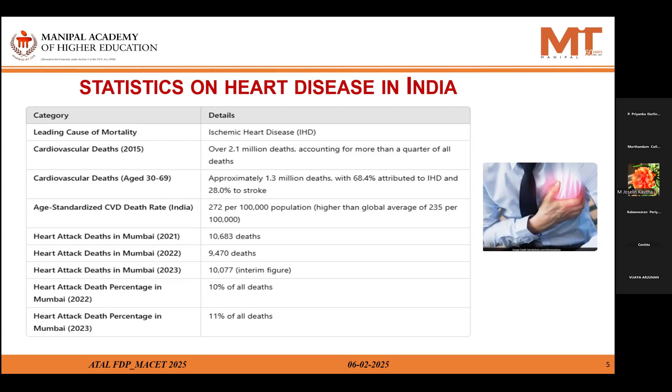These statistics underscore the critical need for effective prevention, early detection, and management strategies to address the growing burden of heart disease in India. So to predict heart disease and save lives, we are going to use machine learning technique. We'll see what machine learning is and how it helps with early prediction of heart disease.

Machine learning is a field of artificial intelligence that enables computers to learn from data and make decisions based on that data. This is just like how humans learn from past experiences - machines can also learn to improve their performance on tasks without being explicitly programmed for each specific task.

Now look at this object recognition example. Here is a human - a human can learn from past experience and make decisions of its own. For example, here there is an object, and the object is a car. The human, having already seen a car or bike before, can easily identify them because the ability comes from previous experiences and observations, since day to day these things are normal. Based on observation, the human can tell this is a car or bike or whatever the image is, coming from previous experience and observation. So the goal here is to illustrate that machines can also learn to recognize objects similarly.

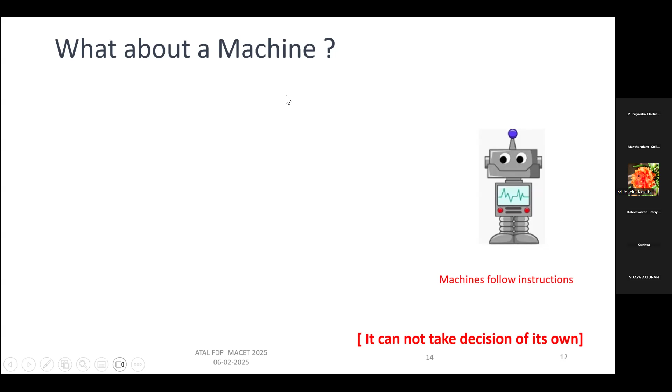In the machine learning concept, machines need to be trained - similar to how humans use previous experience or observation. We need to train the machine with data and algorithms to learn. Machines can only follow instructions - based on the instruction, it will perform, and based on the instruction, it cannot take decisions of its own.

This section will emphasize that while machines currently follow strict instructions, like a calculator, they can also be trained to learn from examples. The idea is to show that by exposing a machine to various examples, it can learn to identify objects on its own. Also here we can see examples like addition, subtraction, some computation - these tasks are straightforward because they rely on precise instructions, emphasizing that machines do not possess understanding like humans.

So here we want a machine to act like a human. So to identify this object, first it has to identify the object, also predict the price in the future. Also it has to do the language, like correct grammar, language understanding, also recognize the faces.

So to learn, machines need data called a training data set, just like a human learns from experiences. Machines improve their capabilities by analyzing large amounts of data. The more relevant data they receive, the better they can perform.